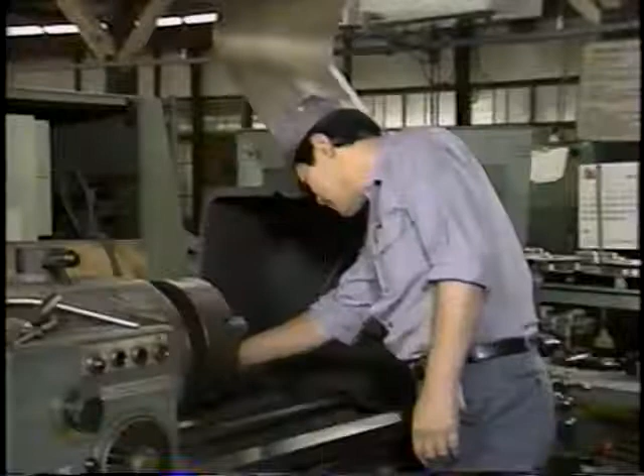But what does this have to do with work in the factory, you may well ask? Well, setup operations can be puzzling, and they're all to do with putting things in order, too. The only difference is that this is only a game, and my time is not money. But if this was a setup operation in the factory, what would happen then? There's a real problem if you don't know when you're going to be able to start the next production operation, because you have to wait for setup.

Right? So, what we all want is zero setup losses, no waste of time, no waste of effort, no endless repetition, and that kind of thing. And that's what this video is zeroing in on.

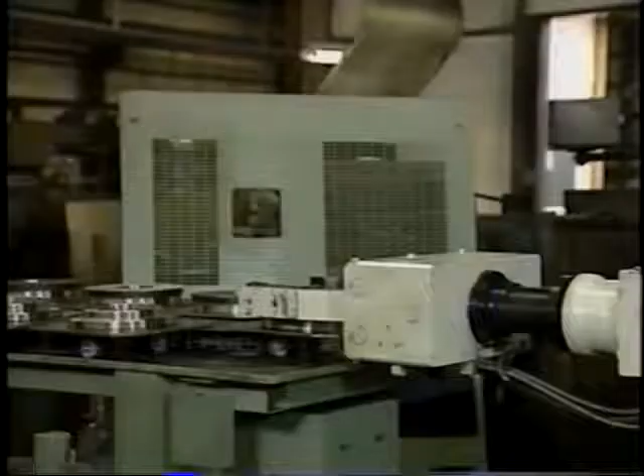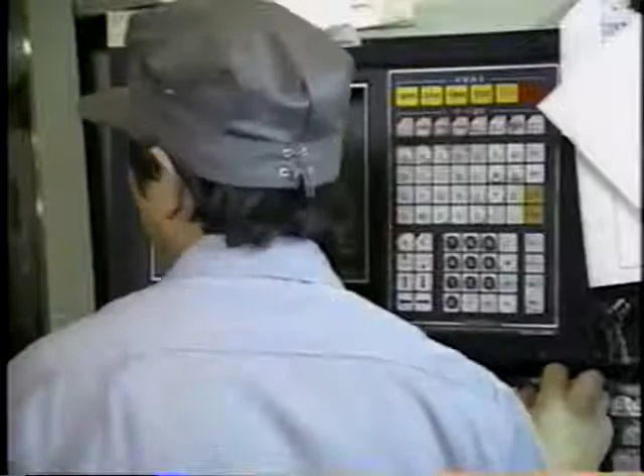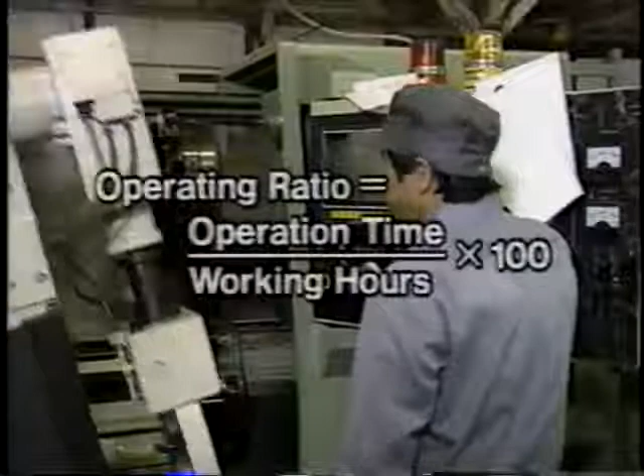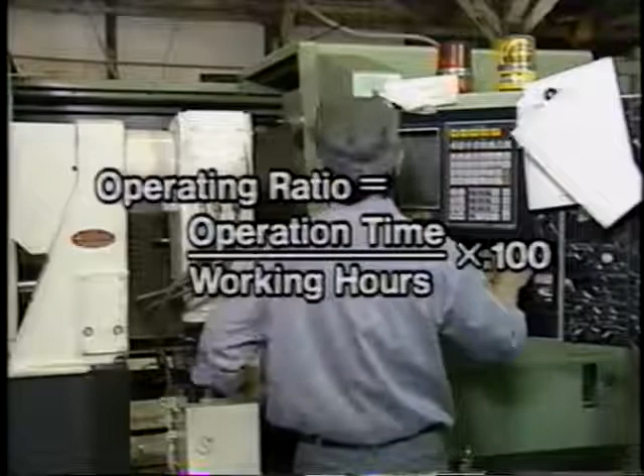The vital work of operators is to produce fine quality products through efficient use of equipment. But if the work process is constantly delayed as a result of setup operations, the production volume goes down and the cost per product goes up. The operating ratio of equipment equals operation time divided by total working hours multiplied by 100. The result clearly shows what percentage of our working life is spent productively and how much is basically unproductive. Reduced stoppages leads to longer actual production time and a far better operating ratio.

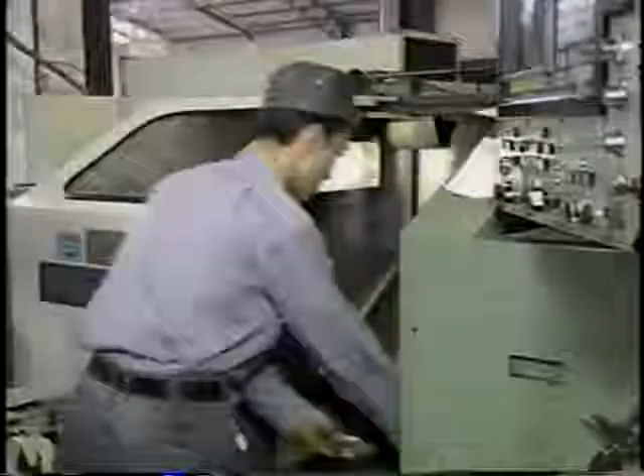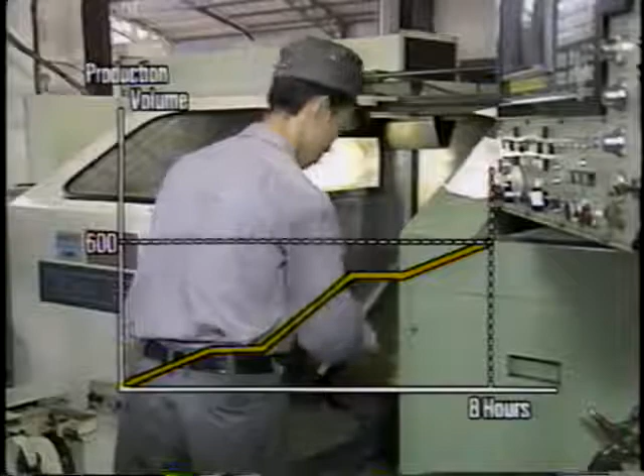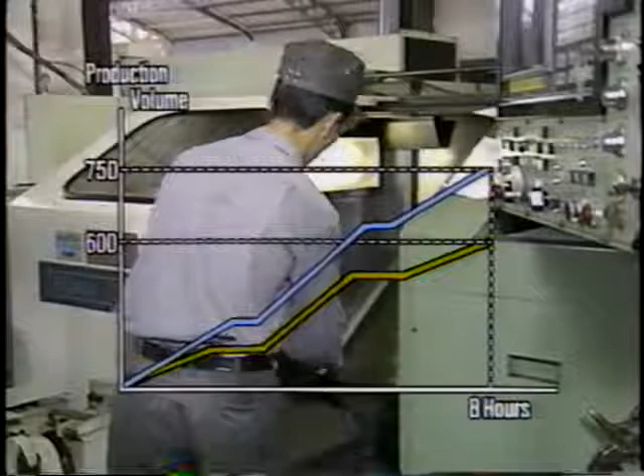For example, with equipment that is capable of producing 100 items per hour, if 1 hour is lost for setup operations and these have to be done twice during one 8-hour shift, then the total operating time will only be 6 hours and the number of items produced will be 600. The operating ratio is only 75%. By cutting the setup operation time to just 15 minutes each time, we can increase total operating time to 7.5 hours, and 750 items will be produced, giving us an operating ratio of 93.75%. In other words, there will be a 25% increase in productivity.

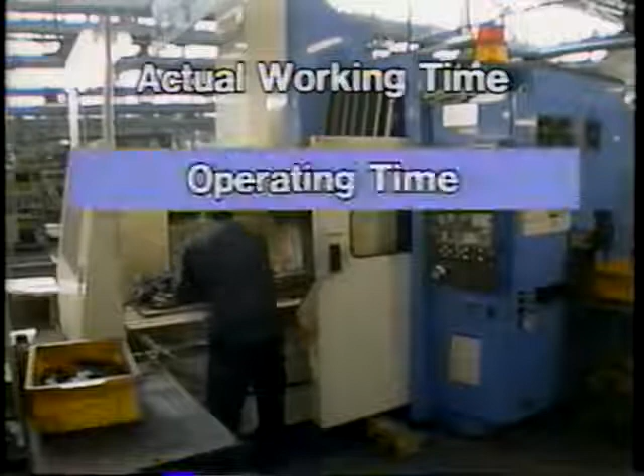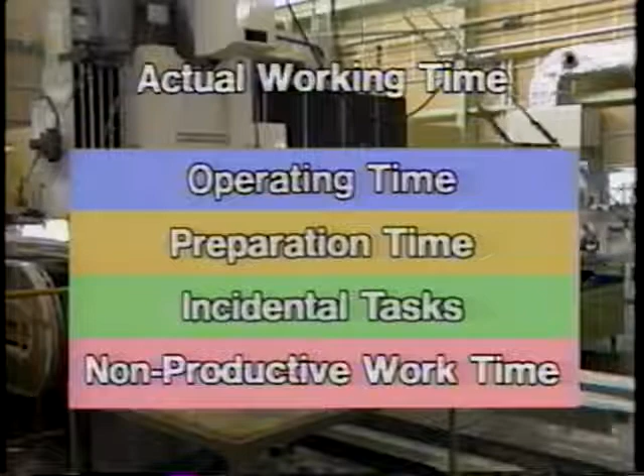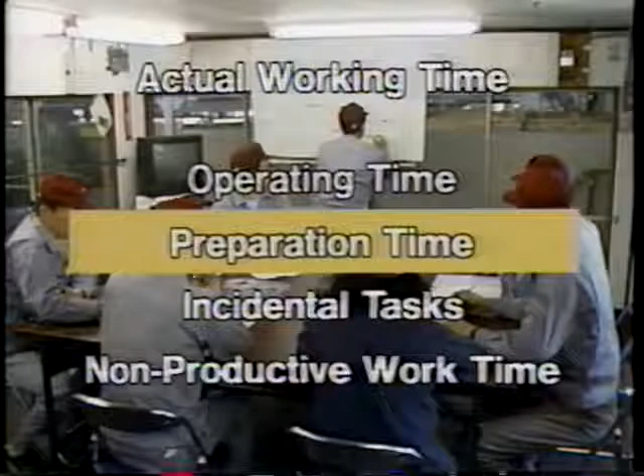Let's see how this works in practice from an operator's point of view. Our actual working time is divided into operating time, preparation time, incidental tasks, and non-productive work time. Preparation time includes necessary preparations both before and after the production process. Incidental tasks includes measurements, checking with manuals and plans, and so on. Non-productive work time includes any activities outside actual production activities, such as meetings and clerical matters.

If the non-productive time spent each day is more or less fixed, then simply by reducing the time for incidental tasks and preparation time, operators can increase their operating time, in effect lowering the cost per item. Get the idea? Losses in setup operations are naturally a problem for the operators. What I think we should do next is take a look at what we mean by setup losses from 4 different viewpoints. 1. Work procedures. 2. Organization of setup operations. 3. Accuracy of equipment, jigs and tools. And 4. The work environment.

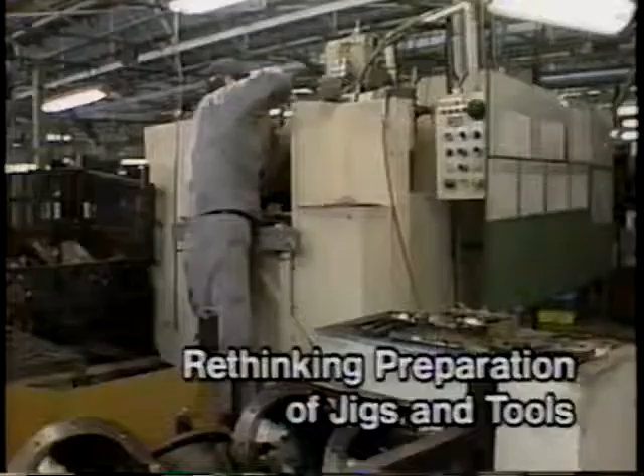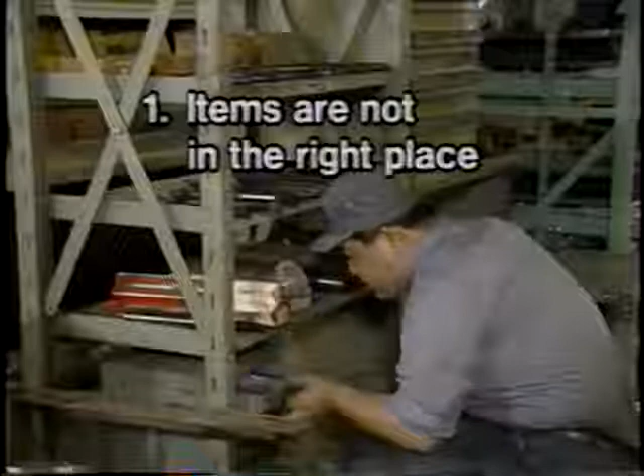Most factories use a variety of jigs and tools during setup operations. Although according to the basic rules of 5S, these should all be kept in a centralized position, three things often occur. Items are not in the right place. It's not clear who is using them. And some items are damaged or broken. If you have any of these problems, then time is wasted looking for the necessary items and you may not be able to use them when you do find them.

The point is that jigs and tools needed for setup operations should always be kept and used in such a way that the operator who needs them never has to move around searching for them. In other words, no moving and no searching. To ensure this, there are three important questions you can ask yourself. Are your jigs and tools suitable for the job, and is there a sufficient quantity of them? Are they stored in an accessible place and clearly marked? And are they available for immediate use?

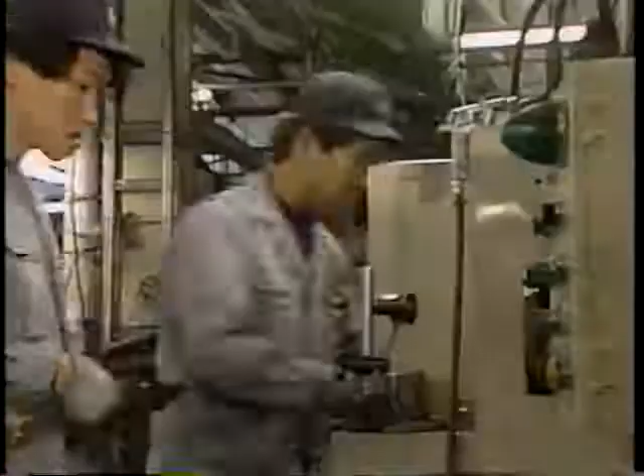On the other hand, even if all the preparation is done well, unless the work procedure for setup operations is correct, there will be little improvement in efficiency. Product quality and production time will vary if each operator sticks to different work procedures.

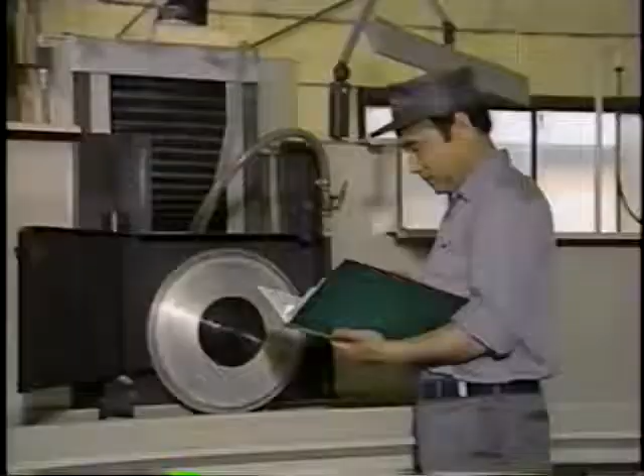Each piece of equipment basically has its own work procedure. It is very useful to draw up a standardization checklist that everyone can understand easily. It should be readily accessible and everyone should be trained to stick to the right operation method rather than use their own individual way.

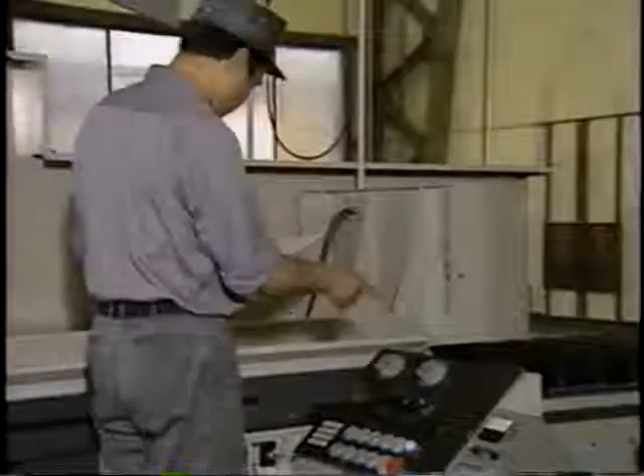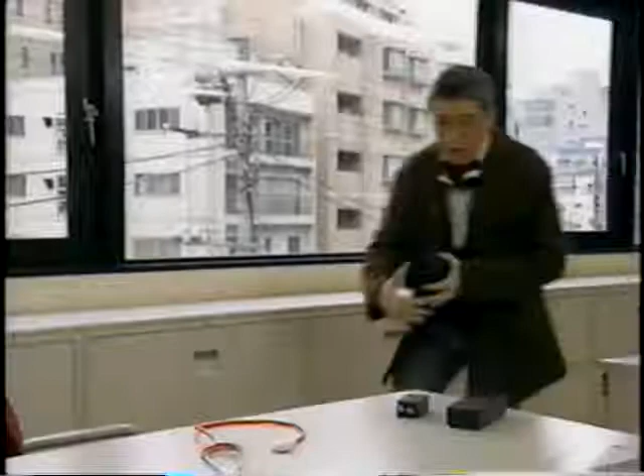5, 4, 3, 2, 1, action! Oh, good, good. Hold it right there. Don't move. Good. Oh. Battery low. Is your battery okay? Did I charge up that other battery? Oh no! Dead! Failed in my setup again. It's reviving!

Which reminds me of what I want to say next. There are two stages of setup. External setup, and you guessed it, internal setup. Internal setup means setup operations which can only be done by stopping the equipment, like stopping to change the battery. And in the factory, that means breaks in production, and that causes losses.

On the other hand, external setup can be done while the equipment is still working. For example, getting the battery charged in advance. In the factory, production can continue while this is going on, and the result? Zero losses for that phase of the setup.

But not everything we treat as internal setup necessarily has to be internal. We should have a little think about whether some internal setup operations could in fact be converted into external setup operations.

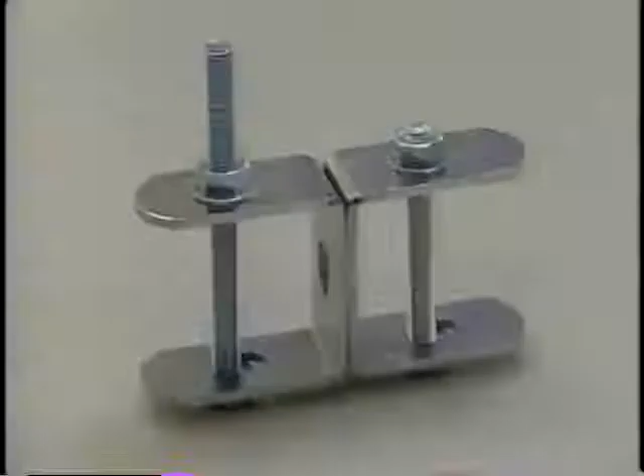You can either save or waste time with setup operations. For example, look at the size of this bolt. Enormous. Takes me a long time to get the nut off. Who designed this? A time waster, no doubt. This is only one. Just think if you had 4. But we're always coming across this type of thing in the factory.

At last. But this, on the other hand, right size. No waste of time, no waste of energy.

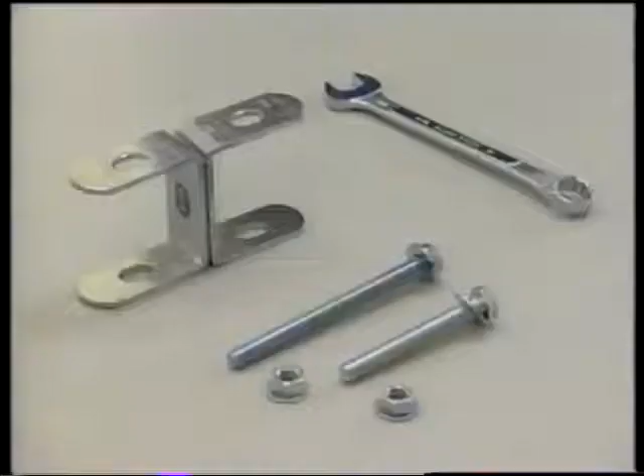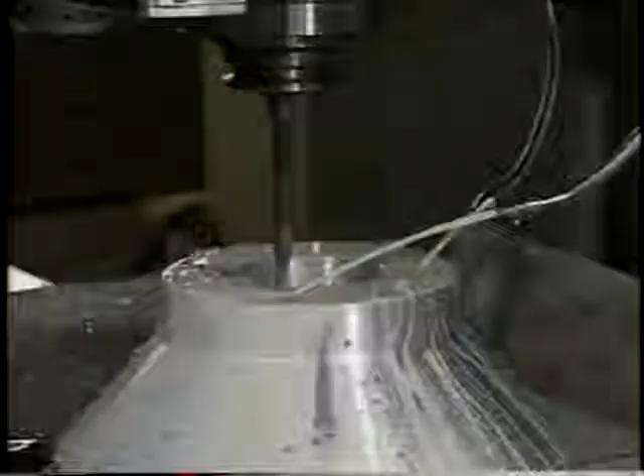Here's an example of improvement of setup operations. In this factory, workpieces used to be fixed on a pallet one at a time for drilling and processing. A lot of time was wasted during workpiece exchange.

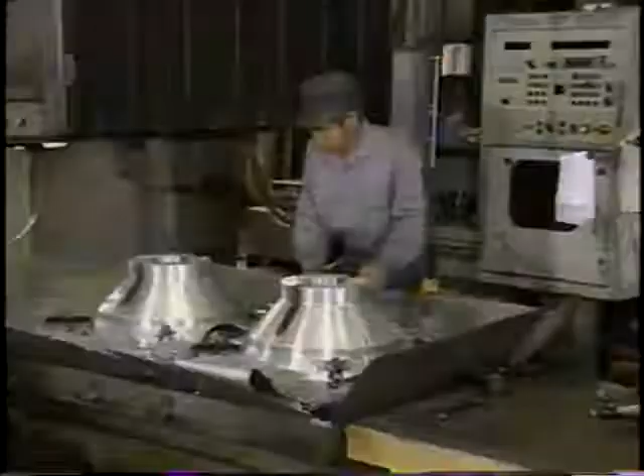The improvement implemented here was to fix two workpieces on the pallet at the same time and control processing with numerical control. The time spent removing and replacing pallets was greatly reduced through careful thinking and the use of automated equipment.

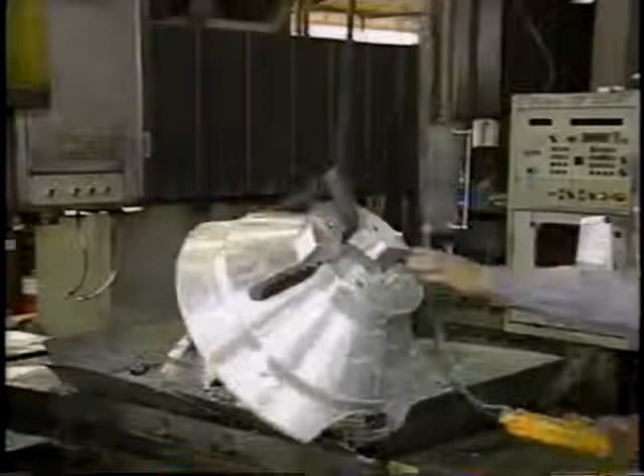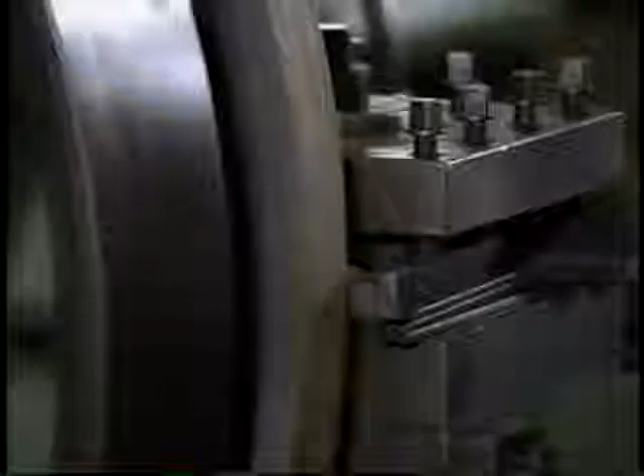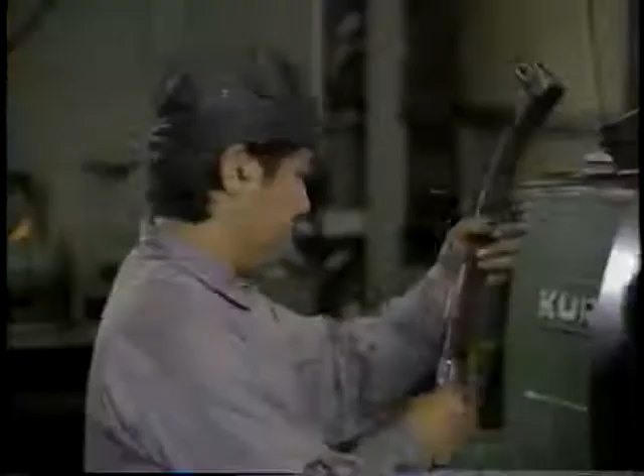You can also reduce setup time by giving careful thought to the shape and condition of the workpieces. This lathe processes the front face and edge of flywheels. Before improvement, a chuck was used like this, so it was impossible to process the front face and the edge simultaneously.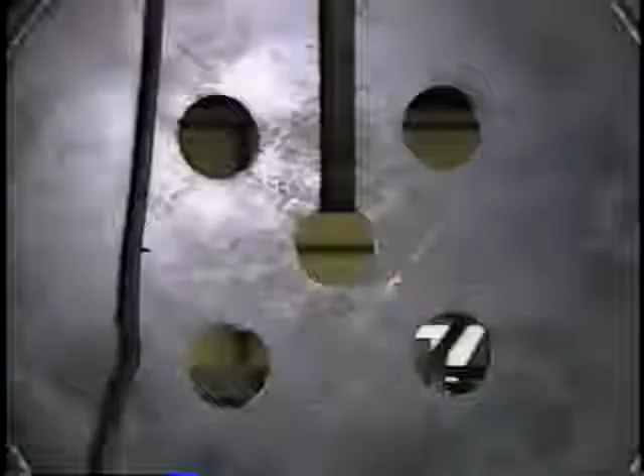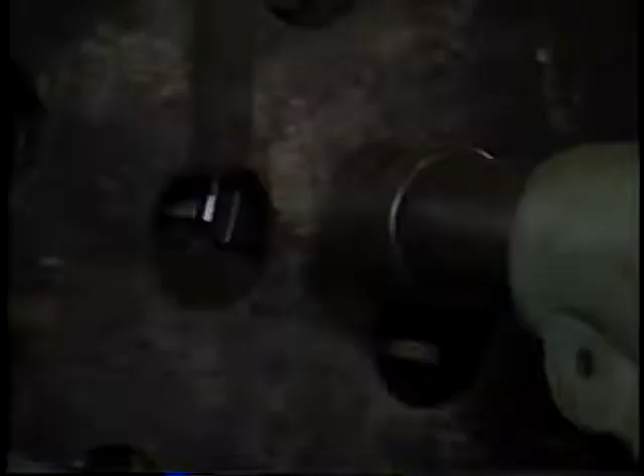The solution was to add holes to the wheels so that chucks could be fixed from the front. Now both the setup operation time and the processing time have been significantly reduced. This rethinking of shape and condition of workpieces can be applied widely to reduce the number of setup operations and the number of procedures involved.

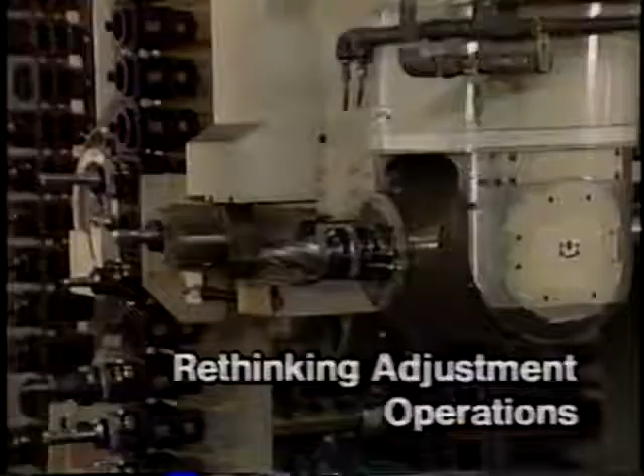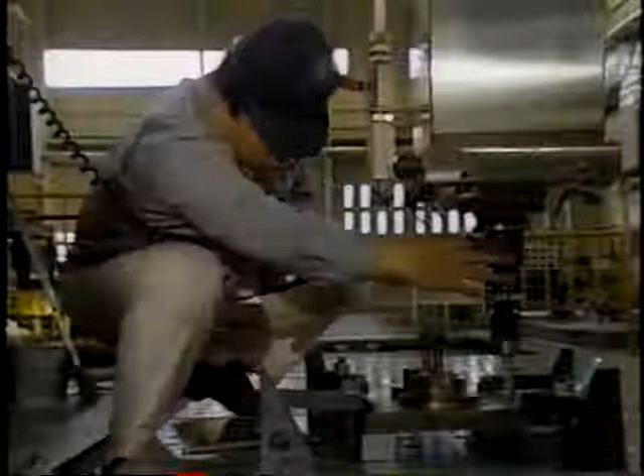It's true to say that a large part of setup operation time consists of adjustment operations. Adjustment involves the repetition of corrections until you can find the optimum and stable conditions for production. This requires trial processing and checking. So it's not just a matter of time. It also depends a great deal on the technical skill of the operator. Any mistakes, and you may have to repeat the process.

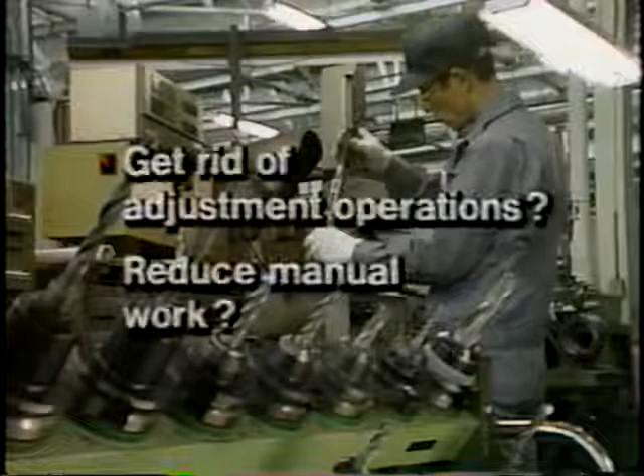What we have to ask is whether it's possible to get rid of the adjustment operations and get machines to do the work for us. In other words, convert manual tasks into automated tasks.

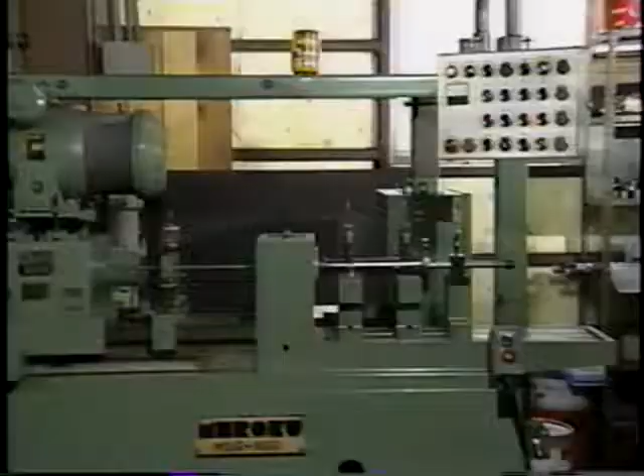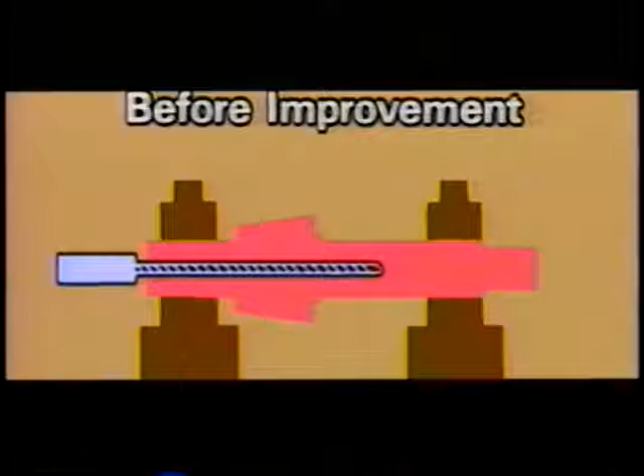Here's an example. This equipment is used to drill holes in spindles. It used to be necessary to drill from both ends to complete the hole, involving adjustment time between the two drilling operations. After some thought, a way was found to drill the hole in one operation using a gun drill.

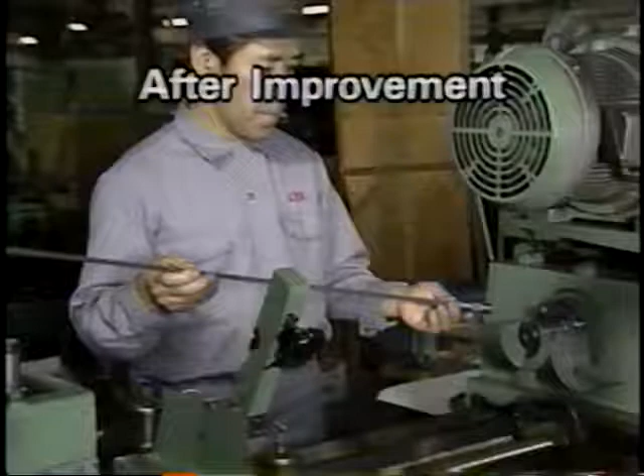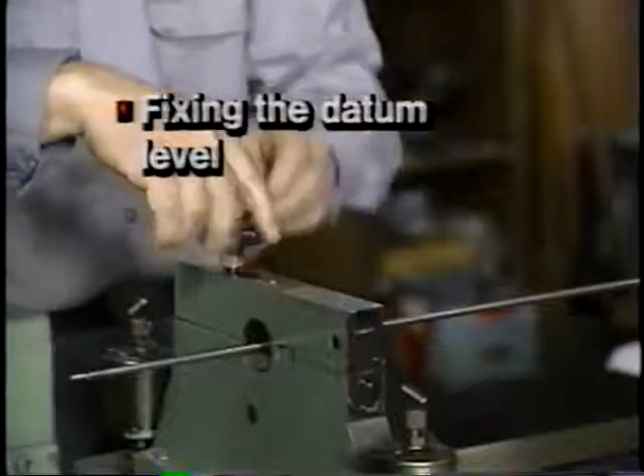You can also reduce adjustment time by improving these 3 points: fixing the datum level, measurement methods, and accuracy of equipment, jigs and tools.

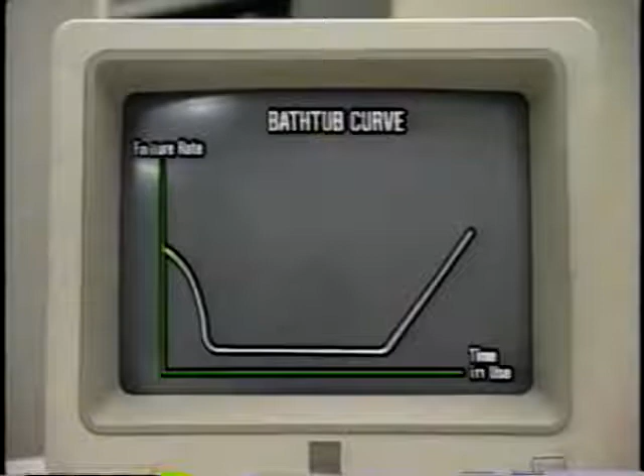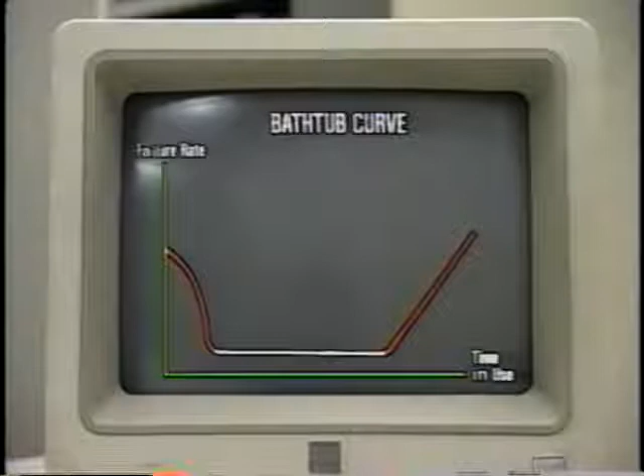I've got a great graph here to show you. It looks just like my bathtub, and in fact, that's what it's called, a bathtub curve. It shows the length of time equipment has been used and the rate of breakdowns. When equipment is first used, problems often occur, but these are usually dealt with by the manufacturer.

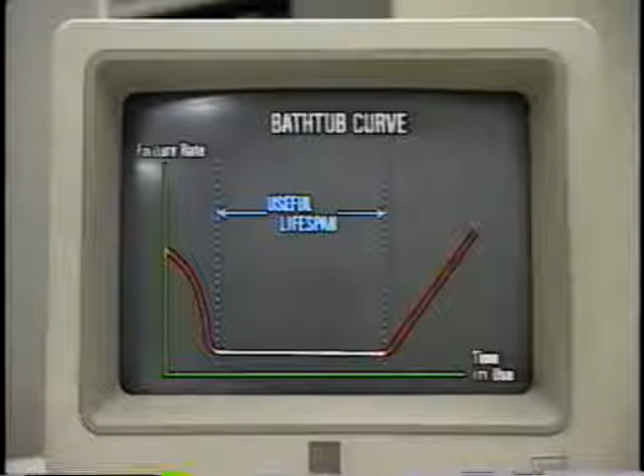Generally speaking, once equipment has passed its useful lifespan, it starts to suffer from fatigue and wear and tear, and there is an increase in the number of failures and breakdowns. Operators normally attempt to prolong the equipment life through careful maintenance and preventive measures. This means maintaining the required accuracy through protecting equipment from deterioration and dealing with any minor defects which could cause problems.

In particular, with regard to setup operations, the accuracy of jigs and tools will have a considerable effect on working hours. It's essential to maintain accuracy at all times. Jigs and tools must be cleaned after each use and all the important parts checked to make sure they are operating with complete accuracy.

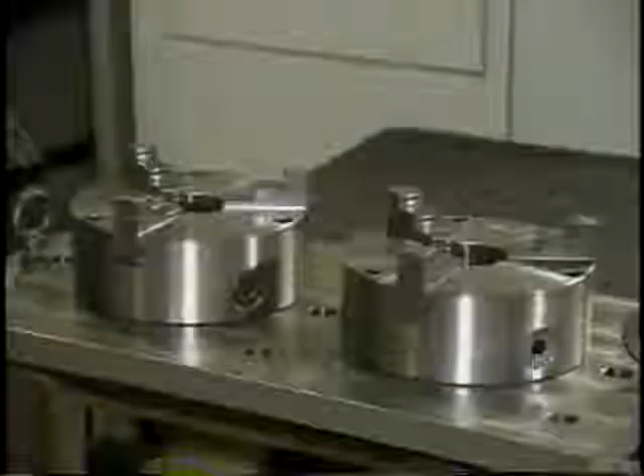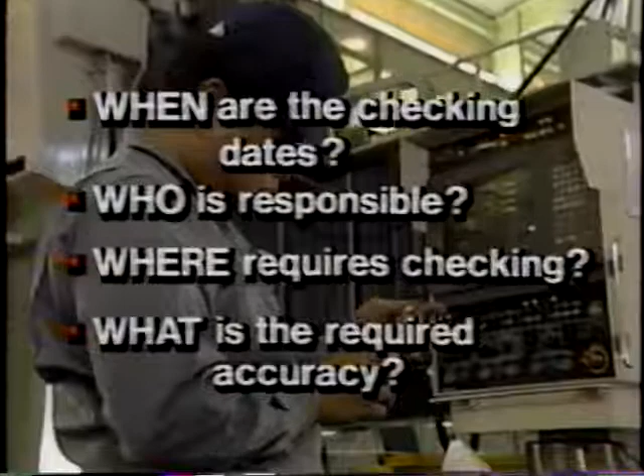Periodic checking is also very important. The checking cycle has to be determined according to the type of jigs and tools in use. To consolidate a periodic checking timetable, you need to answer these 4 questions. When are the checking dates? Who is responsible for checking? Where requires checking? What is the required level of accuracy?

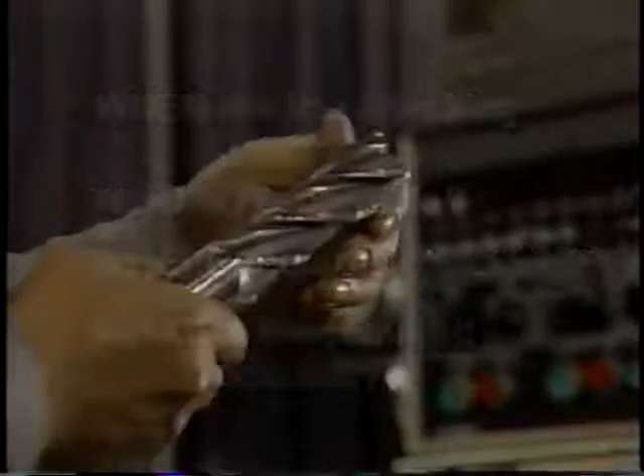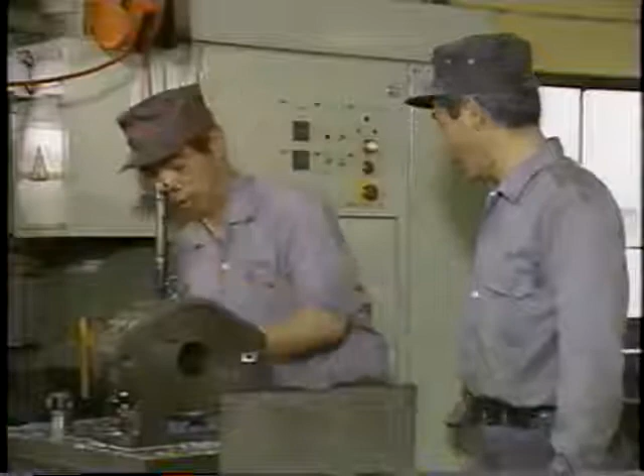However, even if the accuracy of jigs and tools is properly maintained in this way, you still may not be able to get the required accuracy because of the assembly methods employed during setup operations. For example, let's think about a case where assembly of 5 10mm jigs produces a 50mm total height. If the tolerance for the total height is 1/100th of a millimetre, is it really possible to obtain that accuracy when the tolerance of each 10mm jig is also 1/100th of a millimetre?

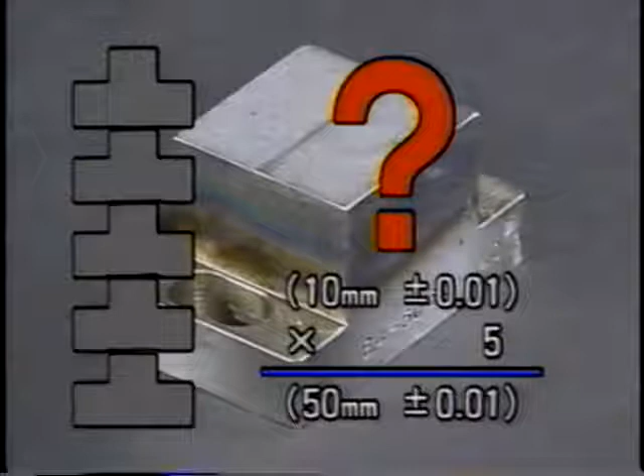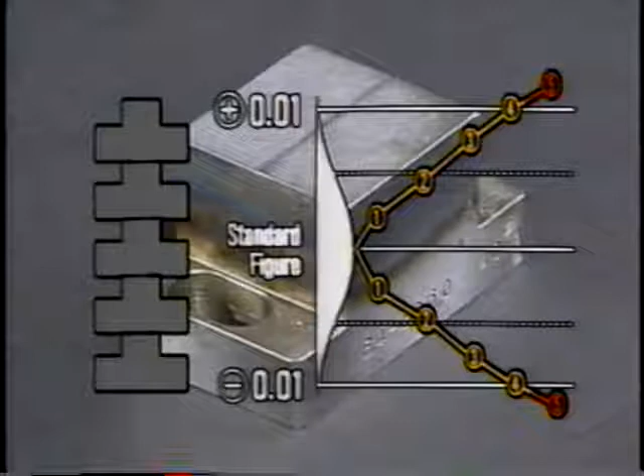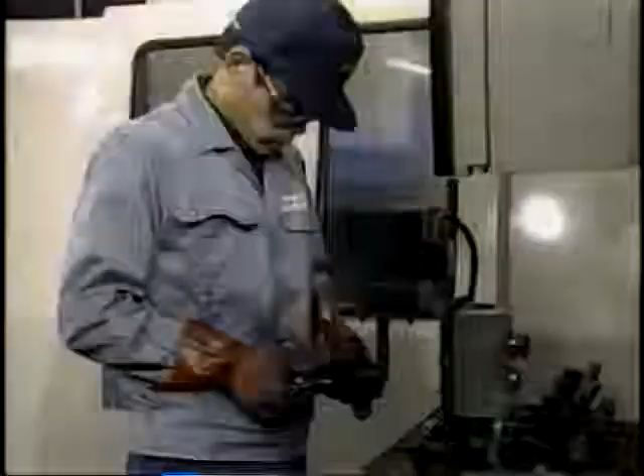As far as possible, it is better to prepare a properly adjusted stack of jigs or a stack with fewer components, rather than having to put many individual jigs together each time. This is the kind of improvement which not only reduces adjustment time, but also removes the point of aberration right from the start. As you can see, through proper maintenance of accuracy at all times, you can greatly improve efficiency and reduce the need for time-consuming adjustments.

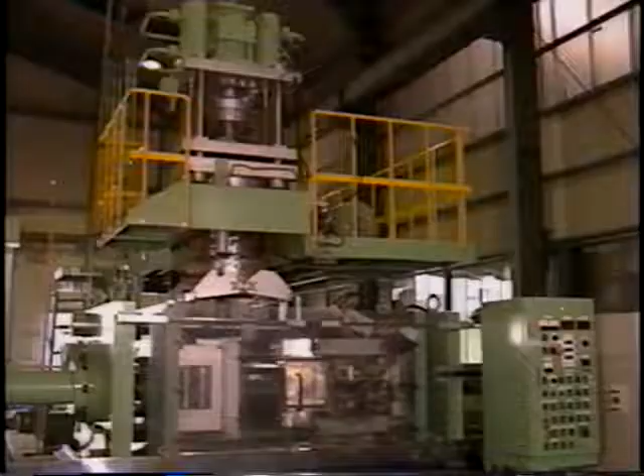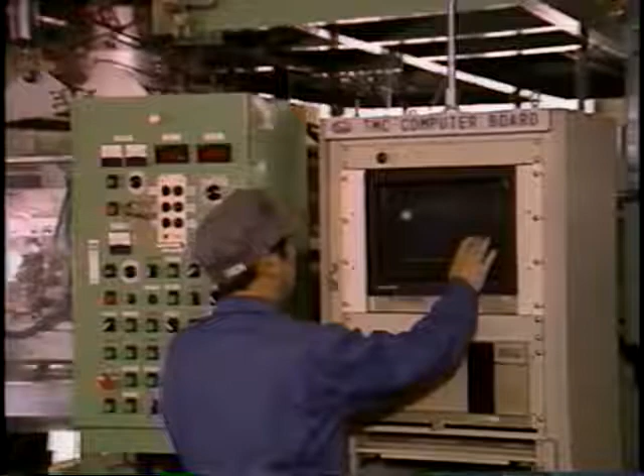But what about the work environment? Even if you rationalize your setup operations, you can't expect much improvement if you don't think about the environment around the equipment. You have to ask yourself a few simple questions. Are your workbench and workplace designed for easy use or not? Are you sure that around your equipment you have no potential sources of trouble which could encourage equipment deterioration?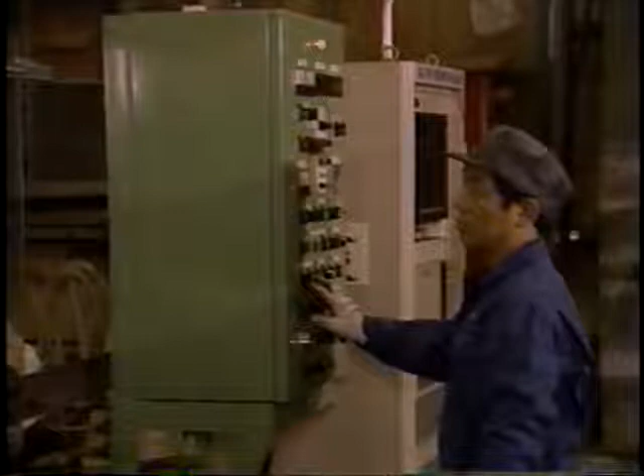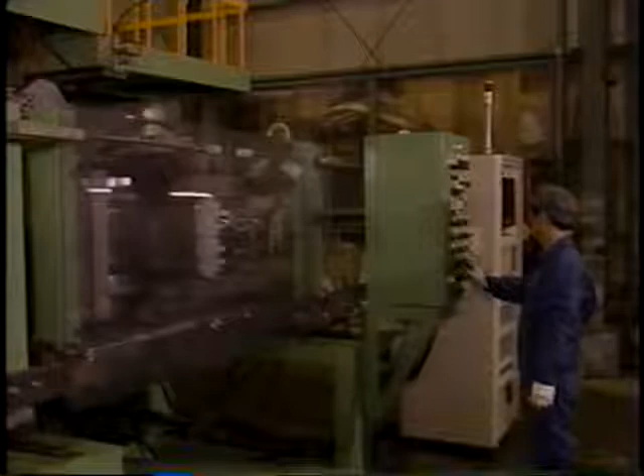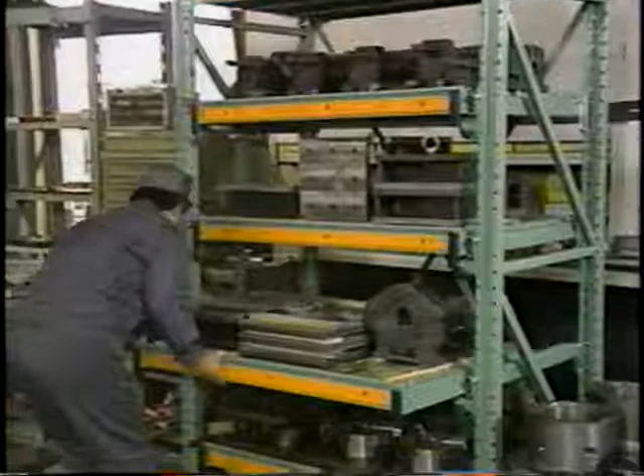Is there anything in your workplace that is unstable, loose or wobbly? Is your lighting adequate or not? It's these kind of little things in your work environment which might well cause problems during setup operations. In other words, you have to improve your work environment at the same time as you improve your operations. Let's look at an example. These are shelves used for storing jigs. Each shelf can be pulled out independently.

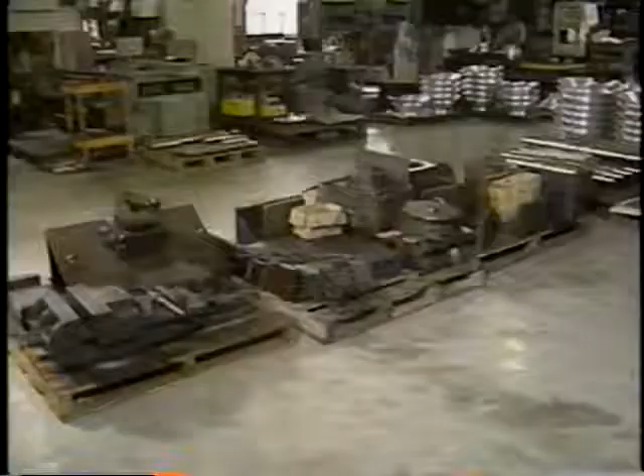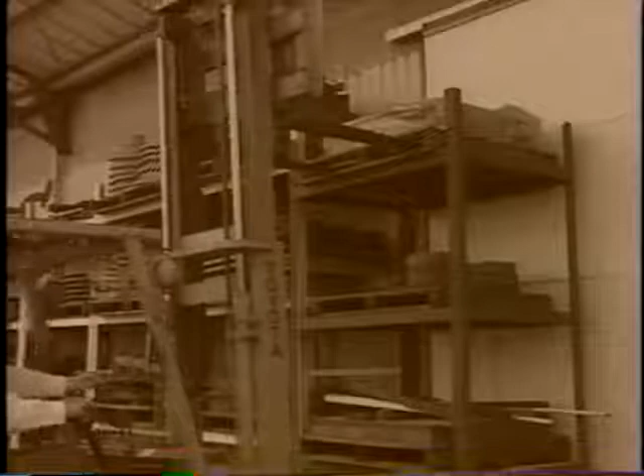In this factory, jigs used to be stored on pallets on the floor. However, that storage method brought on various problems, particularly concerned with safety. The pallets used up valuable floor space. It was impossible to fix a storage position, and it took time to find the jig required. The first improvement was to put the pallets onto shelves. However, the whole pallet had to be removed by a forklift truck and lowered to the floor before a crane could be used to remove the jig.

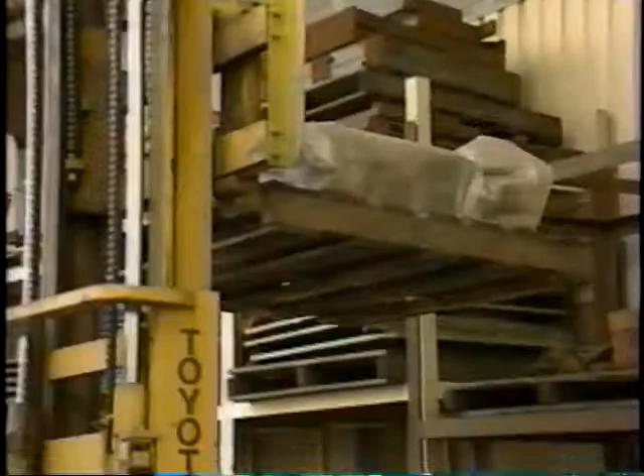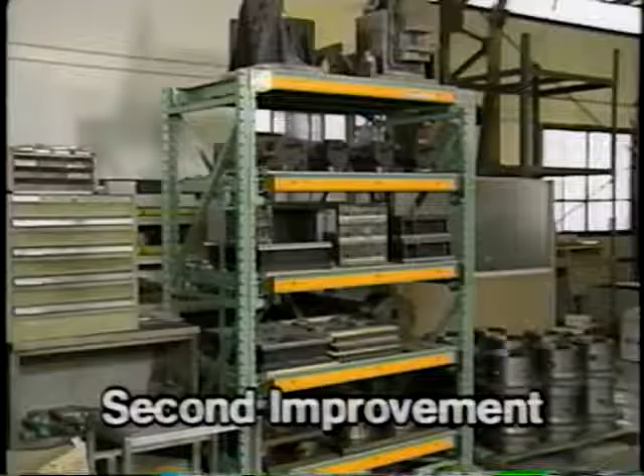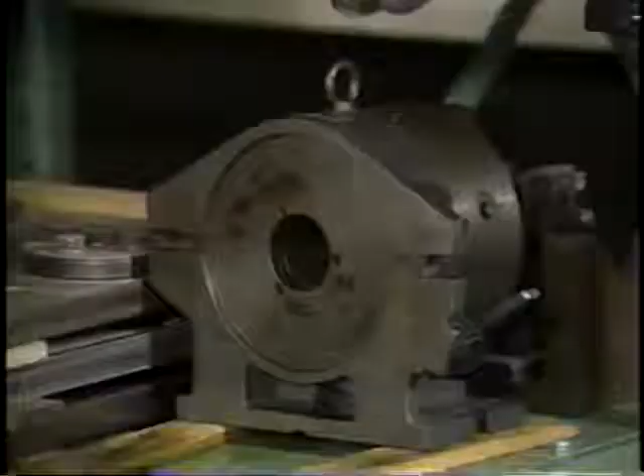The situation still wasn't perfect. So a second improvement was implemented. The pallets were replaced by sliding shelves, which can easily be pulled out to give easy access to the crane. The result is increased accessibility, efficiency, and safety. The point is to work on improvements until you create a working environment which works well for you.

What we've seen so far is there's lots of room for improvement in things we've always taken for granted. Every day I ask myself, what is the purpose of this particular work? Is this work really necessary? Isn't there some way of doing it faster and more easily? You probably ask yourself the same things, and if you don't, perhaps you should.

You see, improvements in setup losses can only start when operators get down to taking a good, hard look at all the setup operations they work on. And remember our ultimate aim: 0 setup losses.